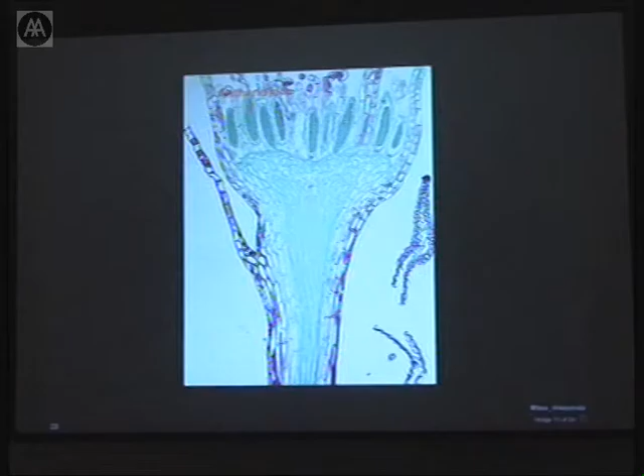So I thought to go from this to this would be an appropriate shock for the end of a long day, second of two. This is the nave roof of the Sagrada Familia church. Those of you who heard me talk just over a month ago will see some material again, but I'm going to be talking about it in a completely different light, I hope. And I promised those of you who were here last time that I would talk about these columns tonight. It's quite clear that Gaudi conceived this part of the building as a forest or a wood, and that these columns would be supporting a canopy.

The building is atypical in that not only was it only about 5% finished when Gaudi himself died aged 74, but he'd worked on it for 43 years.

He worked on it for 43 years before he had to sign off. And he had at least modelled the building at a scale of 1 to 25 and 1 to 10 to at least allow the successors to have a go at completing it.

So my role in the building since 1979, for the first 20 years, and that sounds pretty odd, doesn't it? The first 20 years was actually trying to untangle the geometries, and we will look at this column in a minute, this particular column of 8, and try and understand a little bit more about its description. An act of investigation that probably would only have resulted, given the work that it required, through the need to build it. And I'm reasonably confident if they weren't trying to finish the building, then a lot of the stuff that we'll look at now would never have been in our attention.

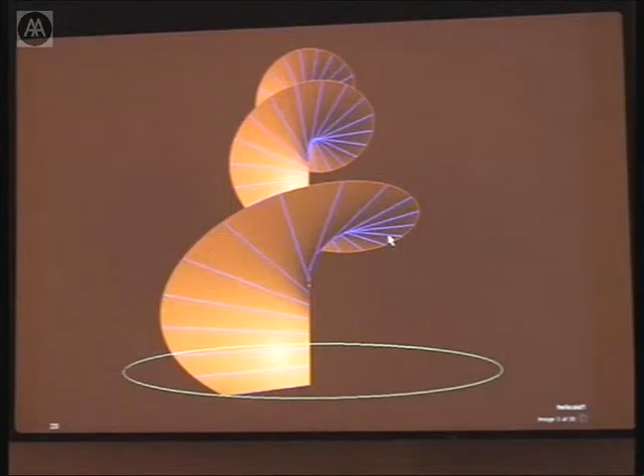The theory is this. Gaudi used 3 ruled surfaces. We looked at 2 last time I was here. This is the third, the helicoid. And the ruled surfaces, or second-order surfaces, are characterized by the fact that their double curvature is nevertheless arranged through straight lines. So you can take any number of straight lines on the surface and define the surface through that. So a helicoid typically is a staircase.

Now in this photograph here on the left-hand side you can see the column. This is a contemporary photograph that was taken in the 20s before he died, so it's no fudging, it's fact. The left-hand side is the column that for a long time he envisaged as being the columns for the Sagrada Familia. And we know about trees having their sort of helicoidal movement. I gather it's through the gravitational pull of the rotation of the Earth. And we know that in the Renaissance, quite often building columns were Salomonic and curving.

But apparently he came to the conclusion quite late in the piece that they were too unidirectional and he needed to actually try something more subtle. And that's when he came up with the idea of this column here. And it's the relationship between these two which are not apparent. But what in fact we're looking at here is the intersection of a column twisted, in this case, anti-clockwise, with exactly the same column twisted clockwise. So in your mind's eye, if you can put those 2 columns together and say, what is the result of the interaction between those columns, then you can see the genesis of this column.

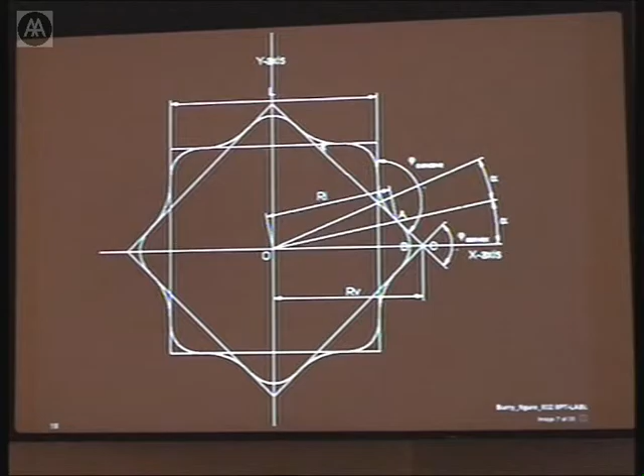So he wasn't a person that flew by the seat of his pants, as it may often seem. He really knew his stuff. And he knew his stuff because he did it himself. Now here's the genesis of the profile. Briefly, it's a convex and a concave parabola, which helpfully meet cotangently when they come together. And they have some parameters which describe them, none of which we're going to move on to today.

So this is what the profile looks like at ground level. And the best way to look at this column, I think, is through introducing the 4th dimension to it. And we can see that in this animation here. What is happening is that, in fact, there's not one profile, but 2. And these 2 profiles are counter-rotating. Each of those profiles is the barley sugar twist. I can show you what that looks like when you put them both together.

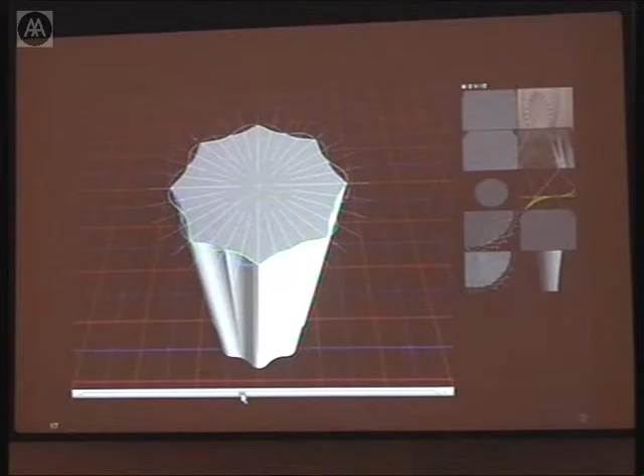But if you say we're only interested in the material, which is the grey area between the profiles, then that is the source of these creases. As the profiles counter-rotate, these creases become more exaggerated. Now this is where the nature thing comes in. What happens if you continue this particular algorithm, shall we call it, upwards? Well, obviously the column will go back the way it came.

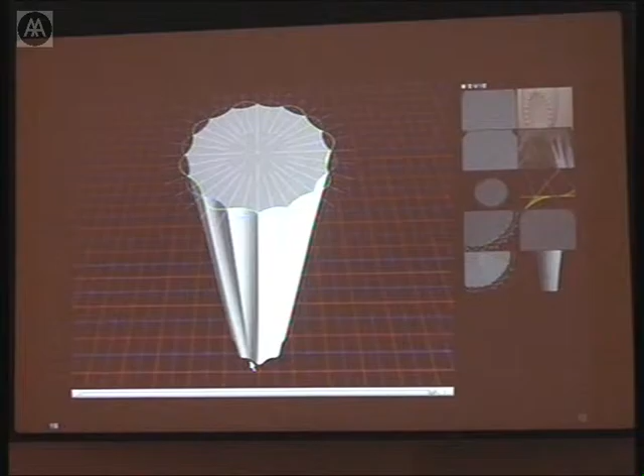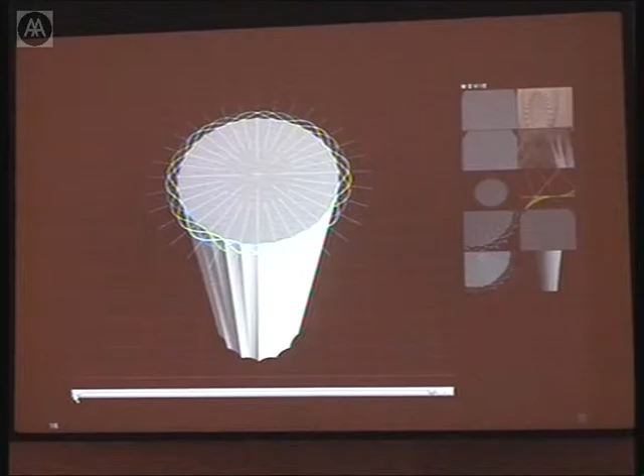And so what happens, in fact, is we find that just as we thought we had one profile at the bottom, there were two. At this point, we find that there are actually 4 profiles, not 2. And hence, we now have 4 profiles counter-rotating. And when we get to that point, it obviously goes back on itself. We find obviously that these 4 profiles are actually 8, which are counter-rotating. So there's sort of serial growth being implied here that leads to the description of these columns.

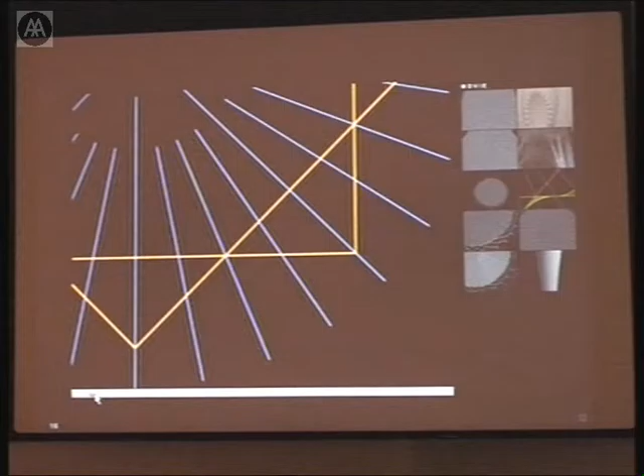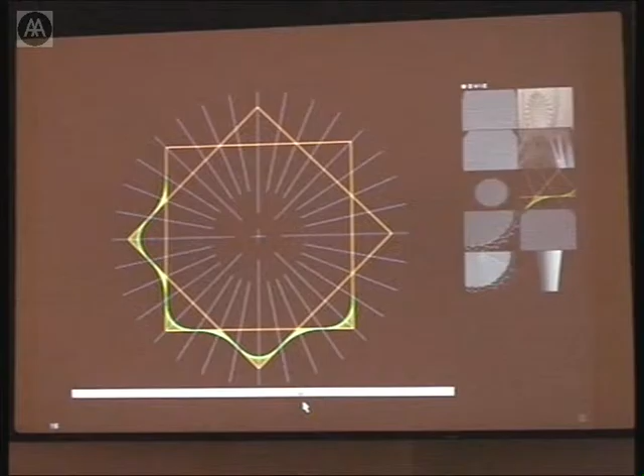The profile itself is simply discovered. It's just a whole series of straight lines forming those 2 parabolas, concave and convex. And if I just move on a bit, you can see. So that's the source of the tree-like base to the column, and you can see the way that this forms the sort of Doric fluting as the column rises, eventually, like all of Gaudi's columns, eventuating in something approximating a circle.

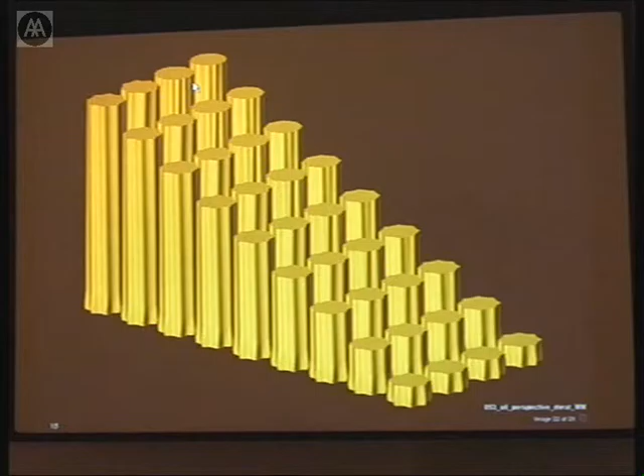This image here, you can see the extent or the subtlety of this move. It's not a very twisted barley sugar at all. It's just a slight twist of 22.5 degrees to the right, to the left. That's what they look like when they're together, and that's what the resultant intersection is. So that's the union, and that's the intersection. Now this applies for most of the columns in the building.

If we move on to this column here, where we get the branching occurring, that's what it looks like. And we haven't got time for me to ask you to pause for thought and work out what is the arrangement. It's the same schema. It's 2 counter-rotating forms. So I'll say that this tree, which is photographed just outside the Sagrada Familia, is the clue for the approach to this whole bifurcation. This object is a simple downward counter-rotation of an oblong down to this point here where they become a square, where they're exactly out of phase by 90 degrees.

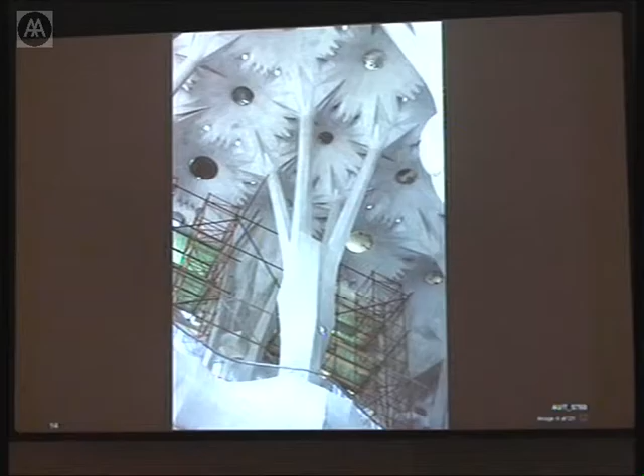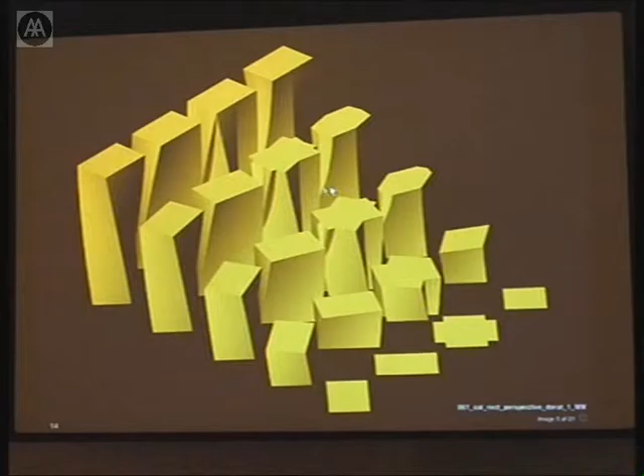So there's the alpha form, there's the beta form. This is what they look like when they're together, and that's the resultant form. So those of you who have got time on your hands, hours of fun taking any form you like, superimposing it and counter-rotating it and seeing what comes out. But it's actually very difficult to guess, I think, that the result of this move is going to give you something as subtle as that.

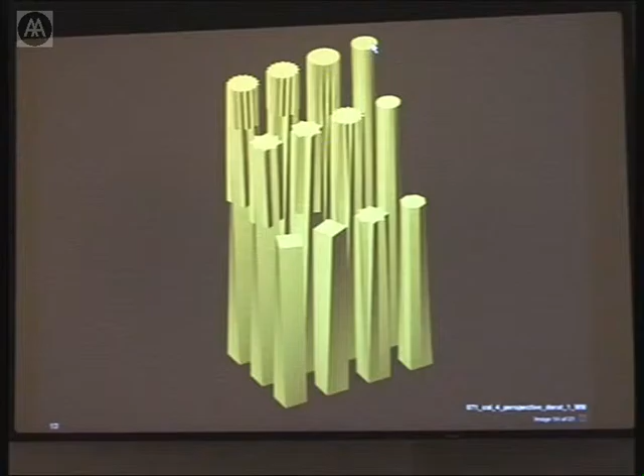And that's the point which is joined at each 4 corners; the same thing's happening with squares. 2 squares are counter-rotating. Alpha, beta, that's the union, and that's the intersection. So you can go from the square to the octagon to the 16-sided to 32, approximating on to the circle, which is where it meets the ceiling forms.

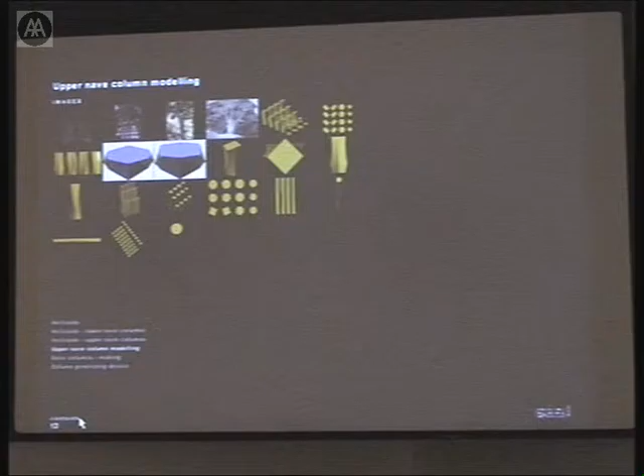Well, that's the Gaudi pre-1926. I thought I would go back over what we're doing now, which doesn't have immediate material from him other than a drawing. So this is looking at the completion of the Passion facade on the west side of the building.

When Gaudi died, he'd managed to complete the apse and just most of the Nativity facade. He'd completely modelled this area here and the sacristies at a scale of 1 to 10 and 1 to 25. The sacristies are the prototype for all the remaining towers, and that is why there's confidence among the successors that there's enough material to continue in good faith.

After he died, the Passion facade was continued more or less a copy of the Nativity facade. In fact, it's extremely different because whereas these are circular in plan, these are elliptical, and the idea for the main front is that the larger, the major axis for the ellipse will become the diameter of these towers here.

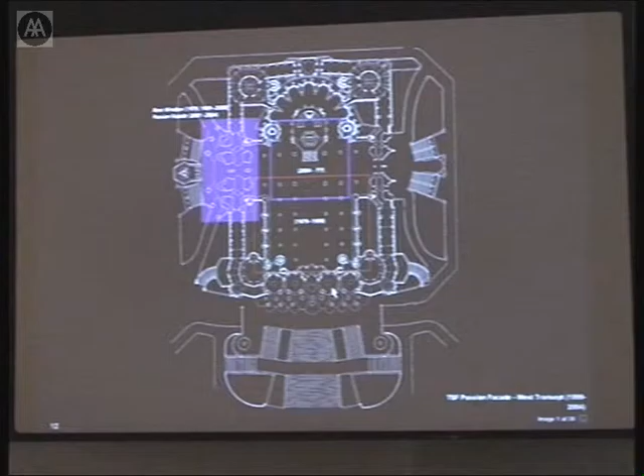This is what it looked like when I joined the building in 1979. They had finished literally the year before the second transept, and this actually is taken in about 1985 when they started building the nave at last. So when I arrived, they'd just finished this.

And those of you who read the Robert Hughes book from 1992 to come out with the Olympics will have read this very erudite tome that ends with about 40 pages of diatribe against the work of Subirachs, who's the sculptor who was given the chance to interpret Gaudi's drawing, which I'm about to show you, and complete this facade.

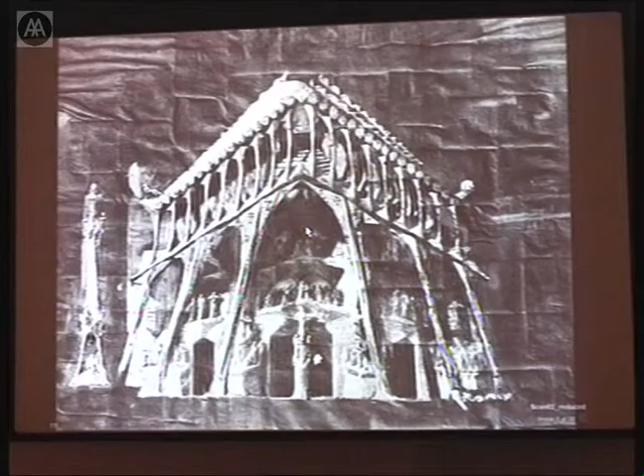When Subirachs was caned by Hughes, he was only halfway through completing the facade, this lower part of the facade, but worse still, there's actually no reference that I can recall from Hughes that recognised that the facade itself was only half built, and that in fact there's the top half. The work that I've been doing with colleagues in Australia has been the completion of this. It's the project of which we only have this one drawing to go from. It's not even the drawing, it's the photograph of the drawing.

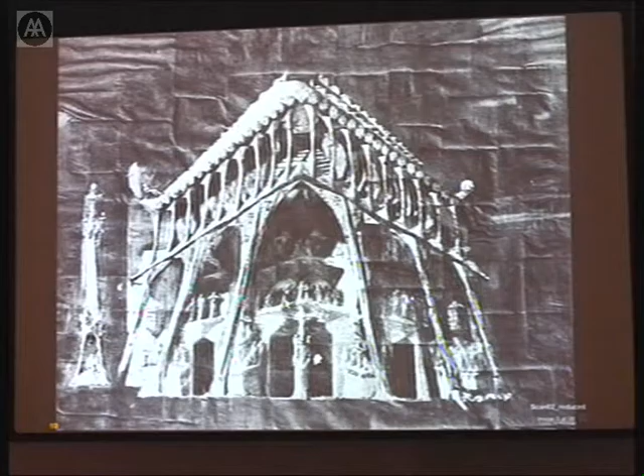So the way we've taken this forward is to look at these as bone-like objects. Here's a couple of bones, some more nature. The reason, apart from the fact they look like bones, is I sort of feel that this top half of the facade ought to be reflecting the actual business of hanging from a horizontal cross.

And so what I'm going to show you is a use of these particular geometries that Gaudi was specialising in the last 12 years. He didn't use any other geometry than these ruled surfaces, and try and somehow get a fusion between a rigorous geometrical outcome in terms of the description that he himself was applying to the building, and this more subtle need to express the passion of Christ.

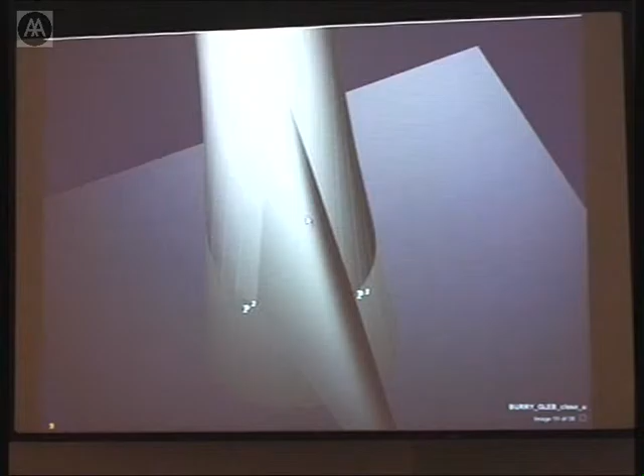So as usual, we start with the sketch, and the sketch then leads to a description of a condition whereby we've got these two surfaces which both have straight lines associated with them, and we want those straight lines to coincide. And the difficulty we have here, and why it gets very mathematical, is that if we know where P2 and P3 are, we need to calculate where P1 is.

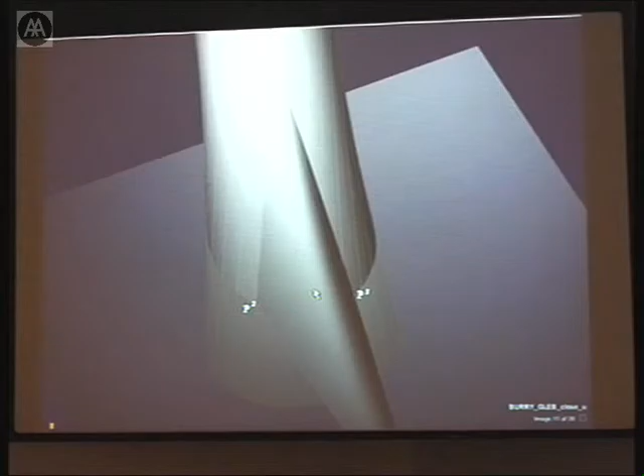This form, by the way, that you're looking at here is like a cooling tower form. So as you can see from the straight lines on the surface, it can be described by straight lines. This is the hyperbolic paraboloid, which always has these straight lines at its edges, the directrices. So the idea is to get these two lines to coincide. Similarly, if we know point 1, can we find point 2 and point 3? So this leads to a completely different form of description for the building than that which we're used to.

And we're looking at something called the schema, or the diagram that's used to communicate between the architect and the computer programmers and mathematicians who are actually going to give us the information that's going to yield these mathematical outcomes. And so that's the schema here. It's explaining that there's a couple of hyperbolas. All the things you see here are parameters with values that are flexible. And that's as close as we get to having a drawing for this particular part of the building.

This meant we go straight into scripting columns that look like this. And this is the prototype made from wax, the rapid prototype that we first experimented with 4 years ago.

And then that information ultimately drives the parametric model. Now, of course, we have no idea what Gaudi would have done with the computer, but the way we treat the computer in the office is that it has to do more than simply be a way to do the job more quickly. We have to do something with the computer that would extend the work in some way.

And what happens in this parametric model is that every single dimension, every single line is connected in some way with each other. You can't make an adjustment to anything in this model without it affecting the whole of the construction. For instance, I hope you can't see it because it's meant to be subtle, but there's a 10% increase in the gap between each column. So this gap here is 10% bigger than this one.

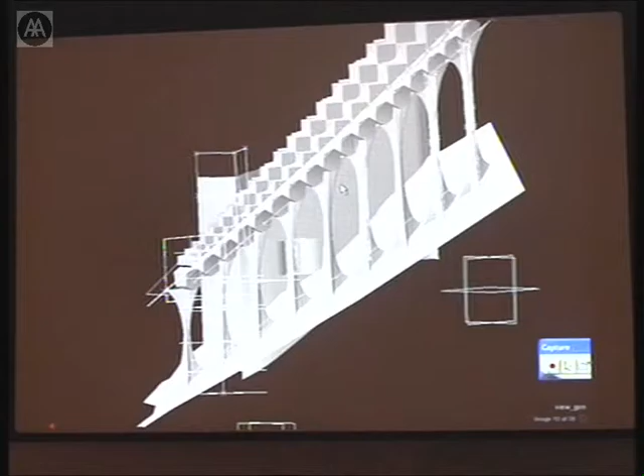reform. And the problem is that if you make a change, often the geometry actually slips out of line. Two things that used to intersect no longer intersect, which means that the program stalls and you actually have to intervene. And I think this is hilarious because although it only takes a matter of minutes for the model to reform itself, it's now taking some hours to reform all the lost or corrupted intersections. So I sort of feel that the human touch is still there, very present, despite the sophistication of the software we're using.

Because of the polemical nature of the project, we had to produce some prototypes at one-to-one. So it's back to this idea of modelling. I meant to make the point that it wasn't enough just to do the computer image. There was a need to actually have the wax prototypes at 1 to 10 and 1 to 25. Then after that, there was a need to get the columns up in prototypes, not in stone. So there's the wax prototype.

Again, another subtlety you might notice is that the straight line of one of these hyperbolic paraboloids has to slide along the straight line of the next one. The relationship between these hyperbolic paraboloids depends on the nature of the hyperboloid of revolution, which is the other form that's going, the cooling tower form. So if you make the cooling tower fatter at the bottom, then it obviously opens up the dimensions across here, which of course means that this all has to change.

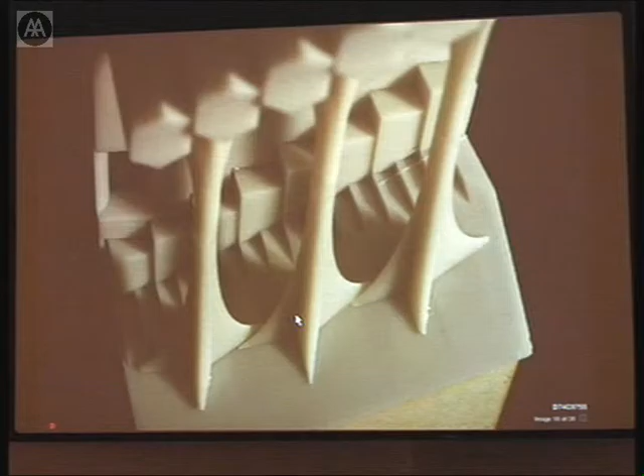So I think that's our effort to try and challenge the computer and the associated software to do something which you couldn't possibly do very easily by hand. So here's the first of the prototypes.

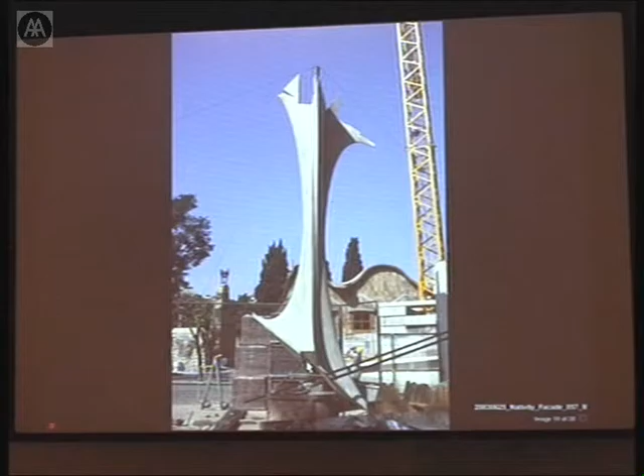I believe the challenge is to look at this and say, the geometry comes second, but the physical appearance comes first. I've tried this on lots of people who don't know what we're doing, and they're very surprised to find this actually has such a rigorous, again another Freudian slip, such a rigorous schema behind it. And there's 3 columns in place. They're there now. They've been there for a year and a half.

There isn't quite a guest book yet asking for comments, but they're certainly looking for comments, and those that they've had so far have been favourable. And here are the hexagons on the top. They don't quite fit, as you can see. They're being fitted. And that's from a side view. And this is, I think, another one of these moire effects.

Here's the kind of condition of the Sagrada Familia, which is very messy, but extremely vital as an indication of what I believe is the way we should be looking at our working environments. I don't mean physically the working environment, the way we work with each other. And that is not to be too up a tree in terms of the digital.

There's Subirachs, the artist, who we have to collaborate with on every project. At the beginning, we don't tell him what to decorate. We listen to what he wants to do and then work out how we're going to conform with his wishes. So those are his tools here.

Mr. Bonet is the architect director, aged 81, as he's proud to tell everybody he meets. He works with a slide rule, which is always in that pocket, and on paper and pencil, and typically, apart from the initial sketches on a sketchbook, I myself will be working digitally.

This is the other sort of messy thing: part of the team doesn't actually work or live in Barcelona, but lives in Melbourne, Australia. So we've been very early adopters of this kind of technology. Interesting that we both have to print the model at each side of the globe so that when we have our video conferences, we're handling the same object. I'm sure social scientists would have a lot to say about that.

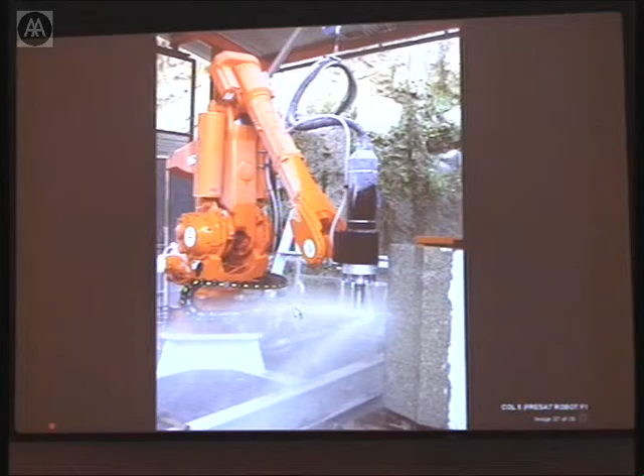Now, he's quite interesting because not only is he from a long line of stonemasons, but he's also a bit of a whiz at computing, so he's a computer programmer himself. And Chris Williams before was talking, I think, very pointedly about the need to get under the bonnet. And I can't help but agree. And the fact that this guy here has taken the trouble to learn how to program this machine here.

Not only has he programmed this 5-axis machine taken straight from the car industry to do its thing, but he's also added another couple of axes through a turntable. So he's actually got 7 axes of movement. And originally he didn't like me showing this picture because he said he was worried about his competitors. Now he's realised that even if his competitors get this machine, they won't know what to do with it. So we're able to look at it.

How are we doing for time? Another 10 minutes maybe? I thought I'd take you into the... Just start leaving when you've had enough. I know I would.

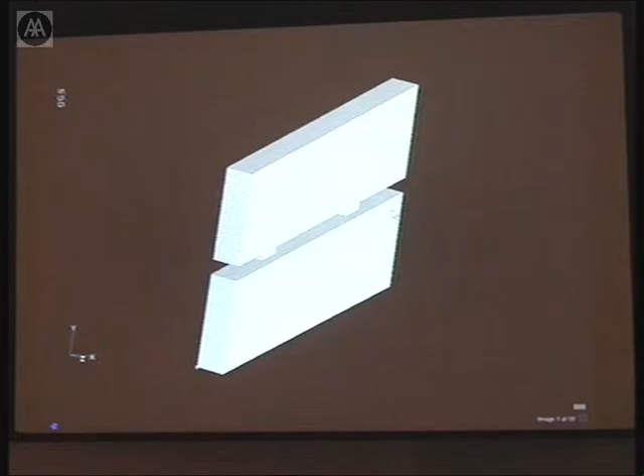What's very interesting is taking this into the next dimension, which is working with the innovative structures group, who are our colleagues at RMIT University, and their evolutionary structural optimization software. And what the software does is it will take a notional mass and just whittle it away, testing it for efficacy to a point like that, where you can see something emerging.

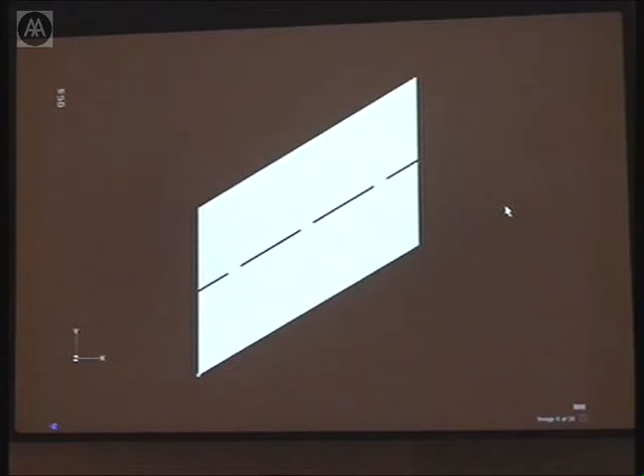This is what's known as a design space. So we're looking at a mass front on, and it's representing part of the colonnade. And there's a condition which is saying that the top and the bottom are separated, but they're connected by what are going to be 3 columns. So when you go through this, I find this is magical myself, this process.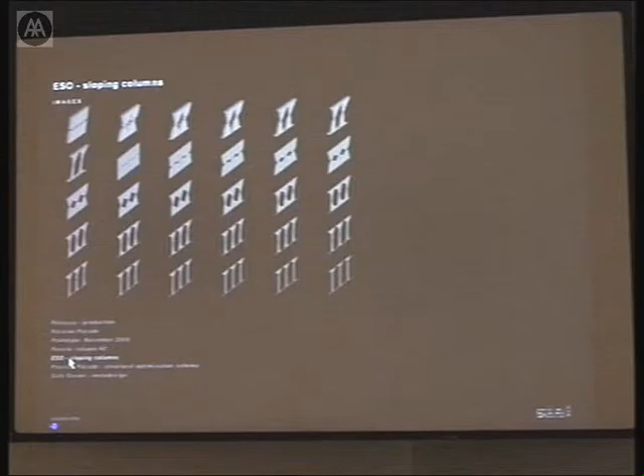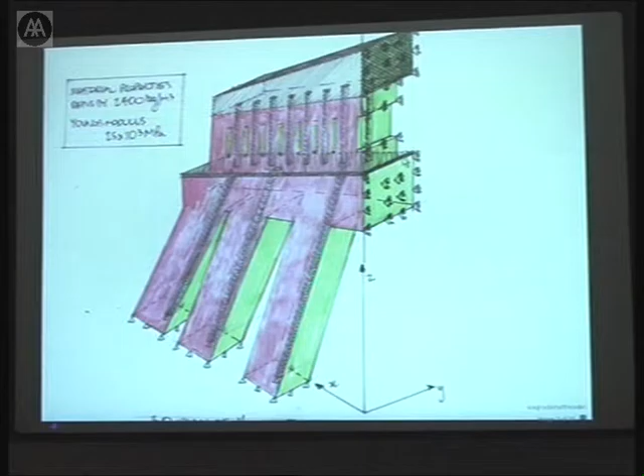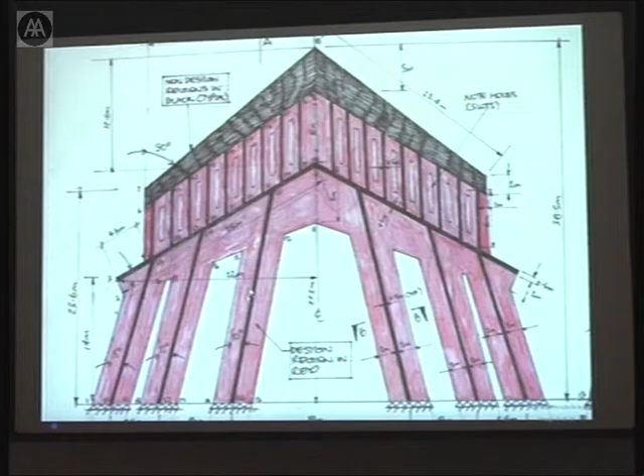What this is about is taking the schema. So this is the engineer schema rather than the geometrical schema that I showed you. This is the way our structural engineering colleagues have looked at the problem. So you can see that it's physically recognizable. It's given some constraints by the fact that these columns will be inclined. But these ones, there aren't any constraints. And then you can see the inclination. And this is a whole series of these whittling away, and you get something which isn't too far from what.

It takes ages, this process. It's many, many hours of computing. I think this one is 36 hours to do what I'm doing. It has to check every little cube to see whether it's really necessary or not. And we do have an animation of this, which does show how this all looks.

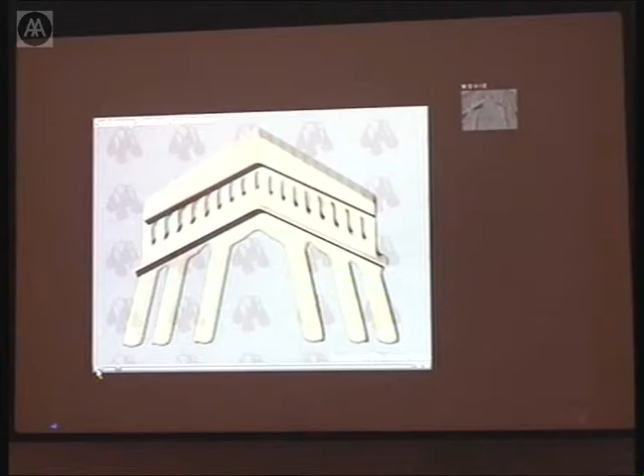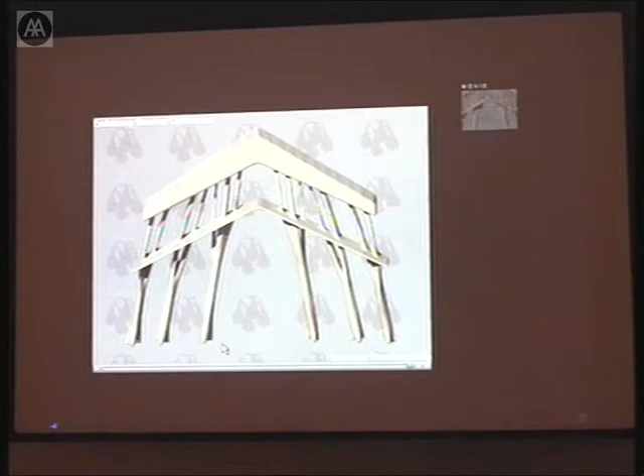Now, as we know, Gaudi didn't have these tools, but obviously the intuition was transcendent if he was able to produce something which the latest computational techniques verify but don't actually create. Right.

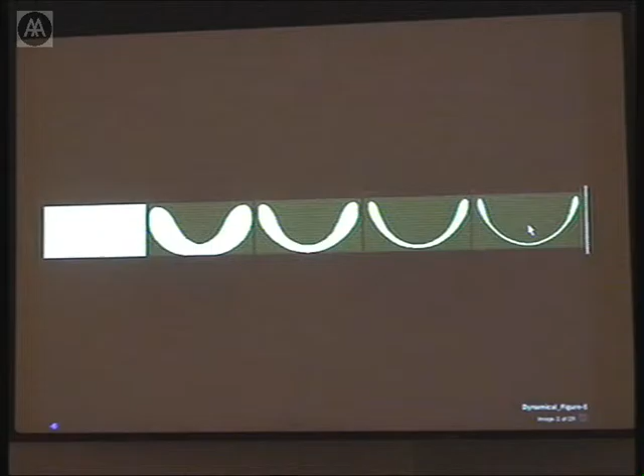This is looking at the structural optimization at work. I first became aware of it when I saw this series of 2D exercises from Mike Xie and his team. And what it's doing is looking at, if you take a mass and you have it supported from one point, what would its ideal shape be? And this is what emerges. So this is the kind of nature connection that actually a cherry and an apple are ideally shaped to do the task that they have. And equally, this is what happens if you have something which is hanging between two things.

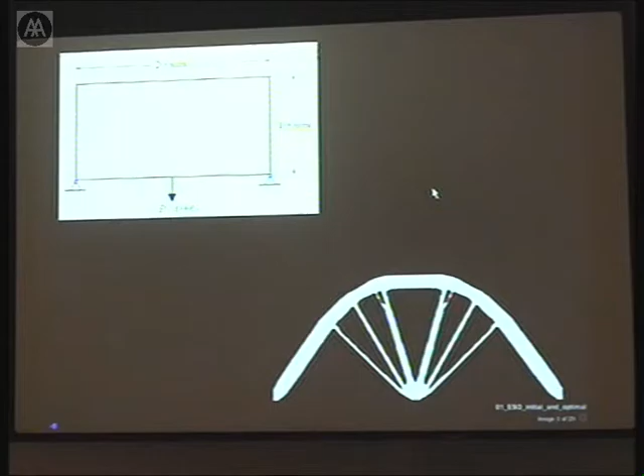Now, it gets very interesting because it used to be called ESO, now it's called BESO, bidirectional evolutionary structural optimization software. The reason it's interesting for me is because I asked Mike, everything seemed very reductive. What happens if you actually start adding stuff? And so what he's done here is a series of experiments where he's looking at, in this case, adding material to form this arch, in this case subtracting.

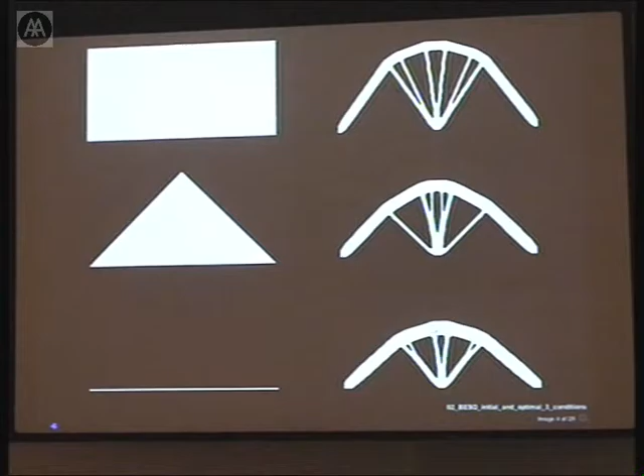So if you subtract from an oblong, you get this shape, and if you subtract from this triangle, you get this shape, and if you add to a notional plane, you get this shape. And apparently they have exactly the same performance physically and in all other respects, except they don't look the same. You get these kind of very weird and unbuildable, at the moment, objects like this.

But this is the most interesting of all the images, because this is the reductive process starting with this, and this is what you get. It's the ideal table to take a mass of whatever it is there. And this is where you take a design space and say, make me a table that would support this weight. And they're similar but not the same. But apparently the similarities from an engineering point of view are fantastic. They're very, very close, volume, centroids, all sorts of things.

I said to Mike, but Mike, they don't look the same. He said, yes, you're right. Doesn't matter. Now, of course, I thought that was the most telling opportunity for our dialogue to go up a notch. It does matter, of course. And what it's now opened is a whole debate; we do a lot of work together. We have several Australian Research Council grants looking exactly at this whole dialogue issue between architects and engineers. And now it means that we know that there are obviously lots of optimal solutions.

You would have thought by definition there should only be one, but apparently there's lots. I mean, here's an example of this. Again, I think this is a very good one, because it messes things up a bit, and we still make a choice. The architect will choose one rather than the other, probably.

We have taken this stuff on. This is work in progress. It's a competition that we got into the final group for a monument, a New Zealand War Memorial in Hyde Park, I think, and working with an artist who conceived of an albatross winging its way back to New Zealand, suspended between two crossing arches that would look a bit like this.

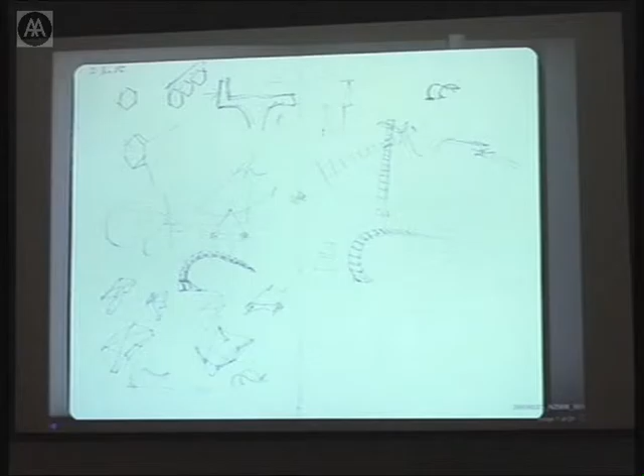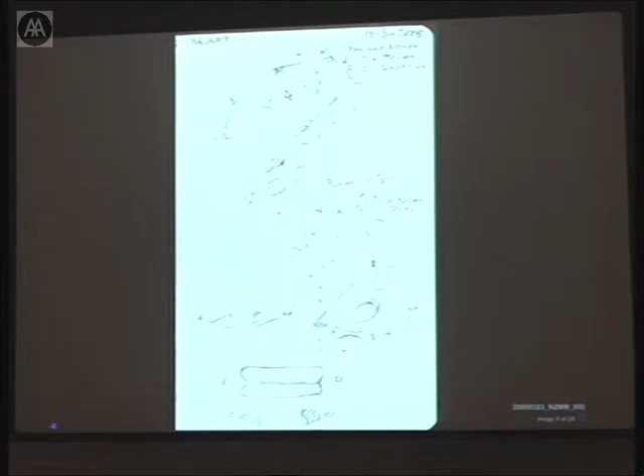So we started looking at whether we could actually make this into something approximating the structure of a hand, where these are the bones, with something tensional along the top. And this is the original sketch that we were working with. And here you can see the beginnings of a model which can be sculpted.

Now, the only interesting thing about this stage, because I say it was work interrupted by not having won the competition, but we are slowly taking it forward, is looking at this work where we're actually seeking to combine a parametric model, this ESO software, and finite element analysis.

So what this is doing, it doesn't show anything, but it's actually looking at whether or not you can get the required movement, because this is meant to be a vaguely kinetic object, and still maintain the physical properties. There's obviously the sort of stress diagram there.

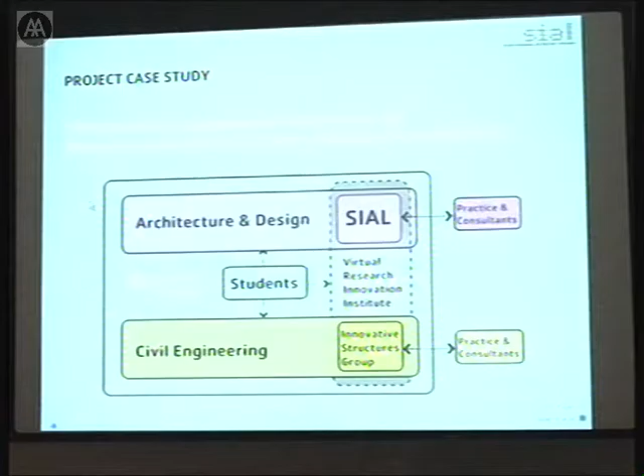Now this work's been taken up by Dominic Holzer, who has just finished his master's looking at this very thing. He's been trying to look at this relationship between architecture and civil engineering via the two research groups. We run a laboratory, and we're a laboratory rather than a studio because it implies that there's experimentation. And Mike runs the Innovative Structures group.

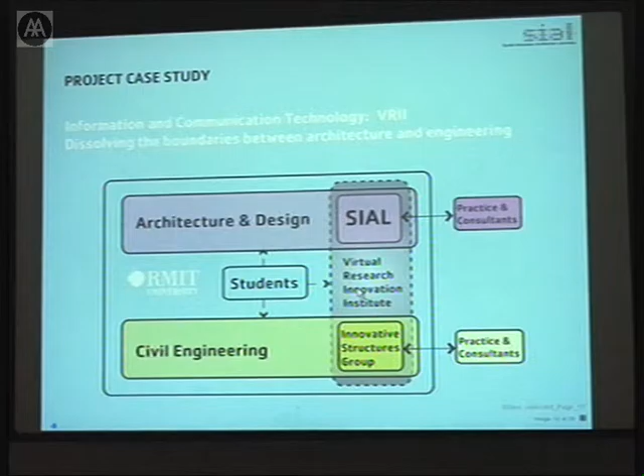And Dominic has found himself in the middle doing his master's, having been in practice. He was an associate at Alsop's for a few years. And he's just trying to deal with this. So he did a series of projects. What we're looking at is, Hugh Whitehead will know about this, he's sort of, I think, coined the term of co-rationalization. Does it come from Hugh, if he's in the audience? But anyway, the idea of actually the architect and the engineer designing in tandem, which has been talked about today a bit.

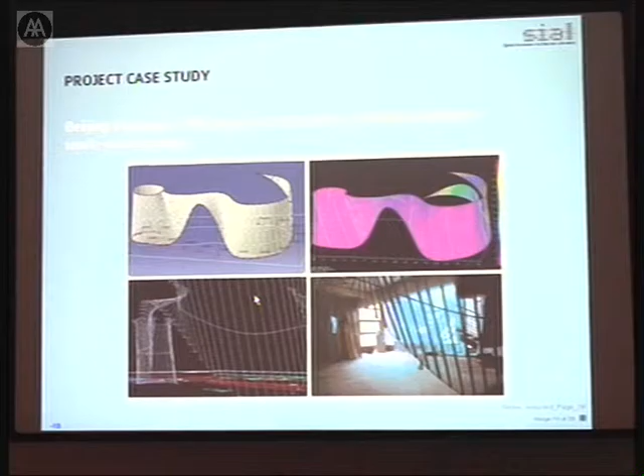And this is a screen for the Beijing Biennale, which we were contributing to two years ago. And this was very interesting because what it revealed was that the engineers in their experimentation weren't able to yield results in time to influence the project. So this was kind of another messy thing, that if you're experimenting, sometimes the experimentation period is longer than the time you actually need.

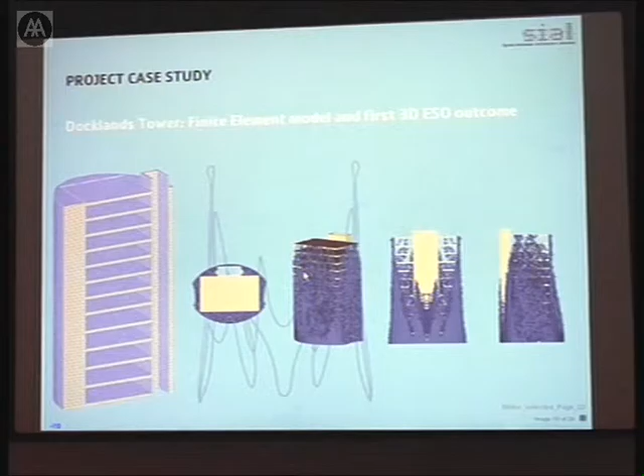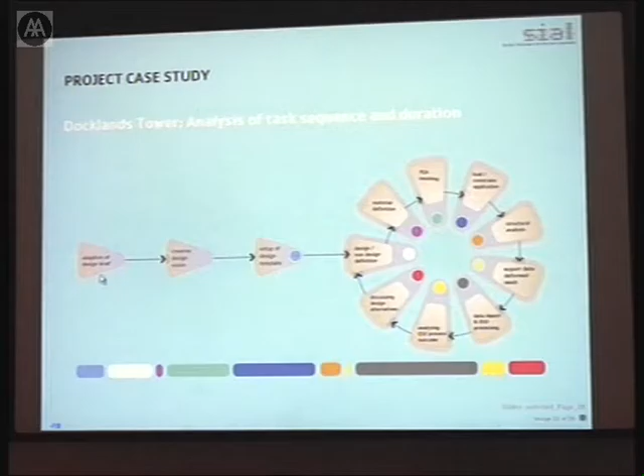Dominic's been looking at using this software to find what would be the ideal form for a tower, again using the constraints from the engineers, and a whole series of outcomes. But the one that I just wanted to dwell on is this issue here, where he's actually looking at the analysis of the task sequence and duration and the number of softwares that you actually require. So in this case, the workflow diagram showing the original relationship with the various software we all have to use.

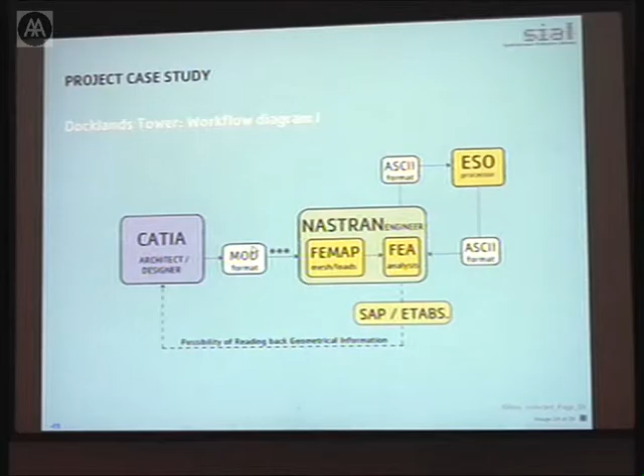So you can show this tower being whittled away as if it's such a simple press a button and you've got a tower, but in fact it's a very clumsy association of all this software. And so his work's been looking at a whole series of plugins which will allow eventually a containment of all this process. We still seem to be a very long way off getting this kind of conversation.

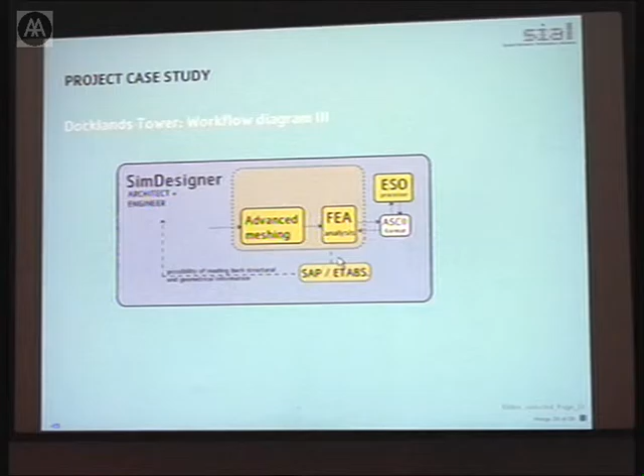Now this isn't a question of just whether one software will read the three-dimensional output of another software. It's actually more fundamental. It's actually looking for the performance characteristics that are associated with each model and trying to find a way of getting those performance characteristics to interrelate.

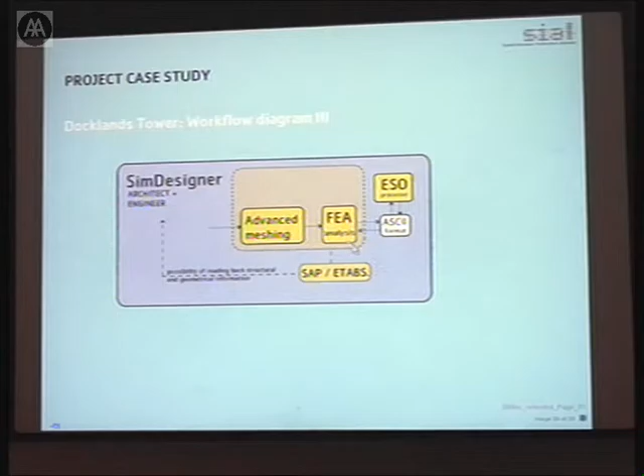Moving on to the scruffiness of a student, this is Stephen Swain, who wanted to look at using Mathematica as a design tool. This isn't Stephen Swain's work, I just noticed, is it? He's been looking at using Mathematica, and he's a senior student doing the pre-major. Pre-major isn't the final project, it's just the experimentation you do to try and state your case. And he's worked hand in hand with an engineering student in the final year.

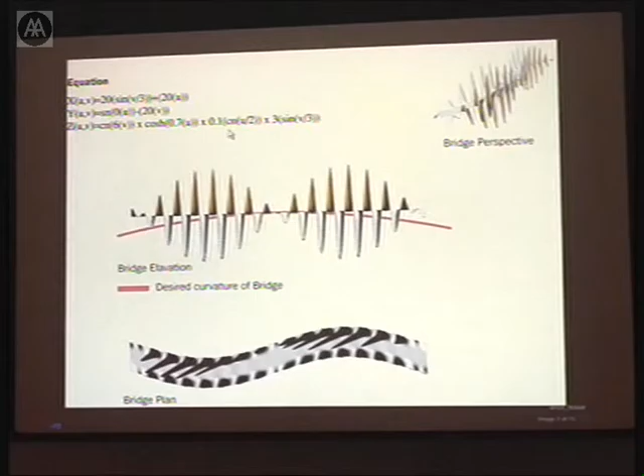So I'm just going to flash through it. It's just an amazing opportunity that we didn't think would come quite this far, when you've got the abilities of an engineer being harnessed with the abilities of the architect to take something far forward. Both the individuals said they had never expected to get where they got to. An interesting thing about Stephen was that he had actually failed the course previously. So in many ways he didn't look as if he'd be the right student to take this on. But he got into this stuff very eagerly.

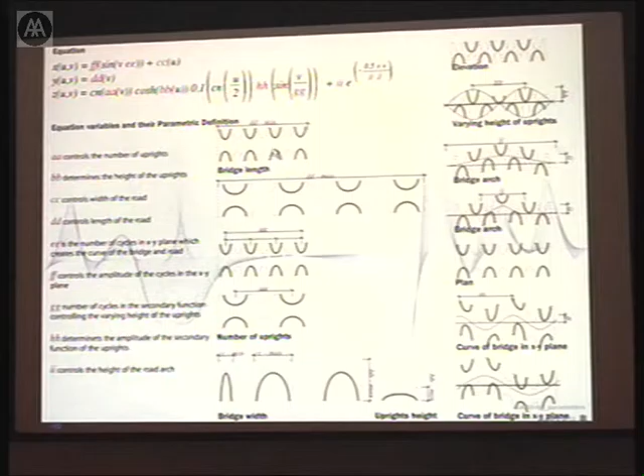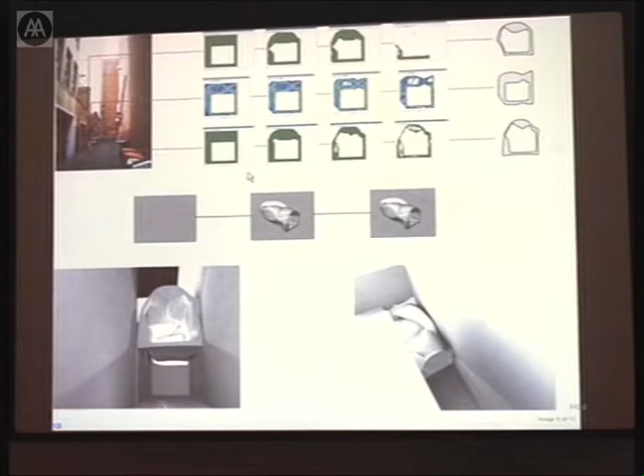These are the sort of equations: Stephen would describe what he'd like to do, and the engineer colleague would find a mathematical formula that could go into Mathematica, and between them they could work out a number of strategies. They looked at the tower. They looked at trying to get a hybrid, there's a railway station, then a hybrid form where the inside of the surface would be one building and the outside of the surface would be another. So this is one of these periodic surfaces. What we're looking at here is a block of apartments that's containing a church inside. And so you get this kind of space on the inside and this stuff on the outside.

I'd love to go over this project in detail, as I would with the next one, which is this bridge. But what I just wanted to draw attention to was the fact that there is this very fertile engagement that can only happen if you've got these cross-disciplinary opportunities. And the trouble with schools of architecture typically, the ones that I know of, which are quite a few now, where there is a school of engineering round the corner, like I was at Cambridge University and we only had to step outside and there was the engineering school, the only reason we ever went in there was to break something. We never engaged with them in any way.

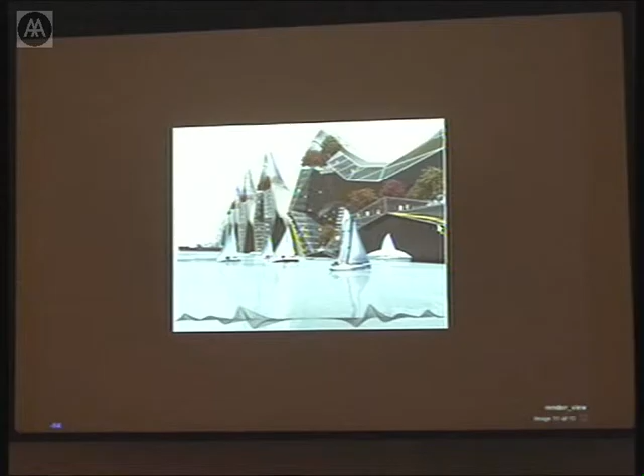And it doesn't matter where I go, with the exception of Bath, I have not come across any really sensible programs. I'll be interested to see if Bath's is continuing with the same momentum, but certainly it's been very, very difficult in Australia to get engineering schools and architecture schools together. But this, from our point of view, is not a project, it's just an experiment with a particular approach to design and a particular way of coordinating work with architects and engineers.

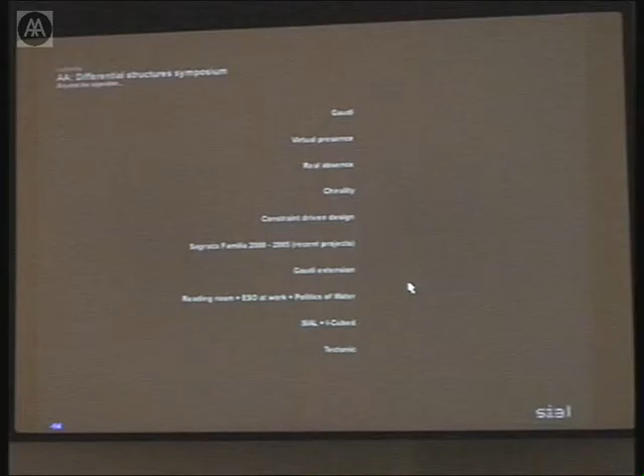Now let's get into the home straight and get back to Gaudi. So this all seems highly contemporary, I hope, because I want to try and dash it all by showing that in fact this kind of thinking was there with Gaudi a long time before any of this computational stuff came along. And so we're back to nature again, looking at this door in Casa Batlló. The question about depth, by the way, was solved by Gaudi in lighting the depth by simply putting dark blue tiles at the top of the tower and white tiles at the bottom and a gradation between the two, thereby not having to worry about having a dark space at the bottom. Anyway, that's an aside. Here's the door in the same building.

What has always fascinated me about Gaudi's work is this whole sense of movement. It doesn't matter what materials he's using, they're all inert, whether they were previously living or not. Somehow he's able to get a sense of life within the material. In this case, we can see something inside that wood just desperate to get out. It's so desperate that it's already beginning to rupture in these little buds. I thought I had a detail of it, but they're beautiful little buds. It's a bit like my moss, the operculum. The operculum's gone, the little thingies are opening up, and the spores are about to come out. So that's one aspect of Gaudi.

Another thing that we've mentioned today is this idea of the pursuit of perfection. And Gaudi, we would have thought, with this extraordinary, rigorous approach to using geometry for the first time in his work in the last 12 years of his life, would be not particularly interested in having models extracted from the street to pose as one of Herod's soldiers with 6 toes.

But Matamala apparently came to Gaudi and said, I've got this character which I think is ideal, he's ugly enough to be one of Herod's soldiers, but unfortunately part of his physical status is he has 6 toes. So should I just make him with 5 toes? And Gaudi apparently said, no, of course, we must represent nature and all its foibles. Okay, that might seem a bit of a one-liner, but we'll keep this one going.

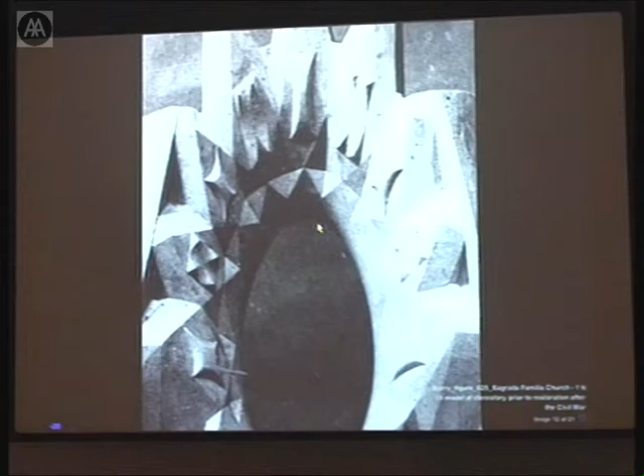And similarly, so that's what we're calling the alpha. If you look at the beta, this one and this one, we find exactly the same things happening. They're the same objects. They're what we call paramorphs, basically objects with the same topology but different topography. And we saw Michael talking about this, I think, in your lecture too. Okay, so we now define that there's an alpha and a beta, but what is running them?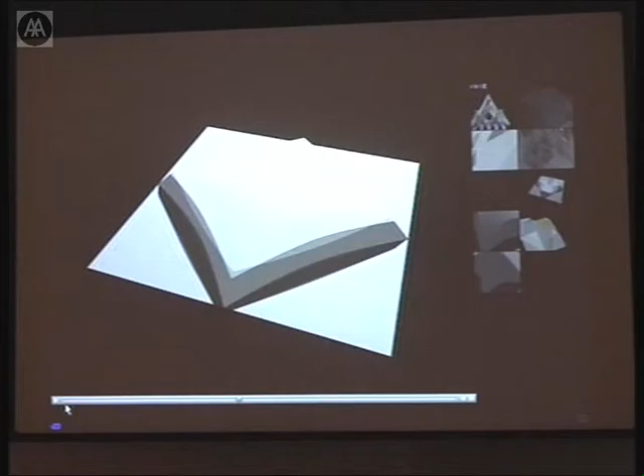Taking this to the next level, well, don't we have to see this to appreciate it? And I think you do. Here it is in the 4 dimensions, I mean, you need to sort of get this in the 4th dimension. Here is this sort of relaxing from the alpha to the beta. And you can see it just settling into, there it is in the neutral state, and it's homing in from this pyramid to this beta form.

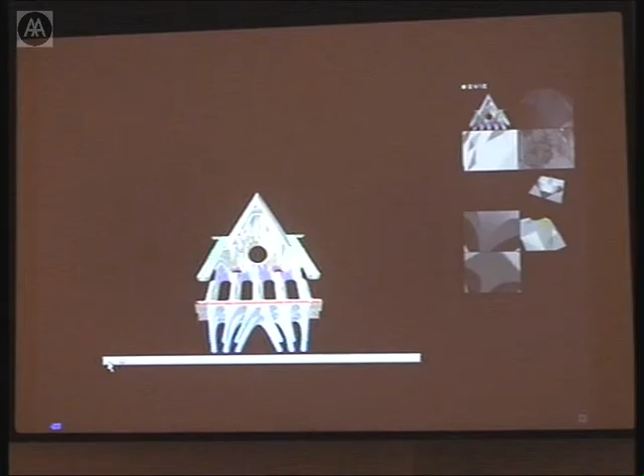Now, if you think back to the door with the expression of life within the timber, I think what Gaudi's doing here is exactly the same thing with the stonework. And of course, this isn't happening, but in the stone, this is what's trapped. Now, the reason I'm particularly confident of this is that there is an extract from a commentary by one of Gaudi's assistants called Martinell, who asked Gaudi, "Master, why do you make your work so difficult? Nobody's going to ever understand it." And Gaudi said, "But that's exactly the reason."

So what I think is very important about this is the fact that such a simple little thing as these motifs actually do have an algorithm. You need to actually tackle that algorithm to do the animation. Obviously, there's 250 frames to that animation. I didn't model every single frame individually. I wrote a little script, and it was a script that was less than 1 page long that was able to write all the different iterations.

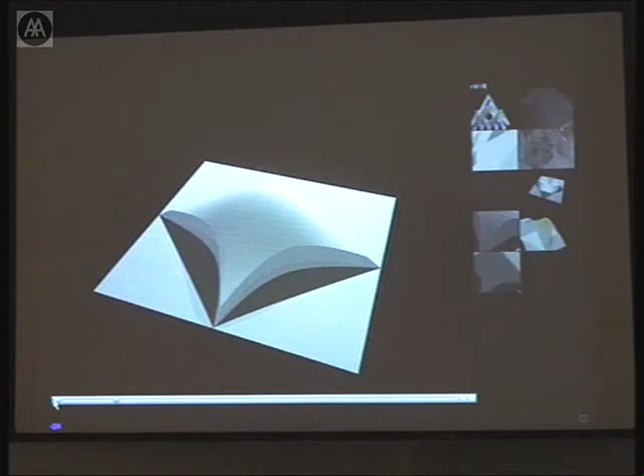Of course, by having the script and being a kind of inquiring sort of person, I realized that there's the stopping point. With Gaudi, he must have actually had a sense of what the ideal shape would be for the alpha and what the ideal shape would be for the beta. But what happens if you stimulate it with a bit of drugs or something and make it a sort of turbo alpha and a turbo beta? What you can see here is this monsterism actually appearing. It's constrained by the fact that you've got this alpha and beta in the actual finished product.

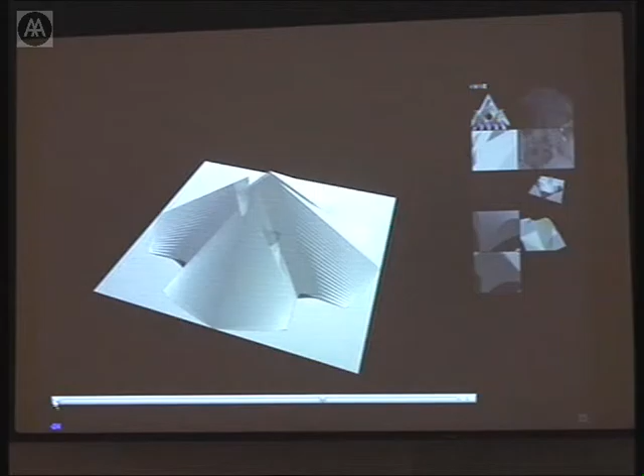But the algorithm which actually goes from the alpha to the beta can start ahead of schedule and finish after schedule. And of course, in our contemporary world, we don't actually need to even worry about what material it is. We can actually go sort of hyper alpha in glass and then just take this down for a series of iterations. This is usually better with no light at all. And you get these gorgeous, I think they're gorgeous things. It's just the same algorithm. All that's happened is that it's starting a bit earlier and finishing a bit later and coming out with this stuff.

And then for those, this business of a plea for not necessarily having to get engaged with the most expensive software in the most expensive way. This is an interpretation. It's part of a piece that I'm doing with a sound artist. I'm not playing the sound now, but looking at whether this whole adventure can be explained in more poetic terms as a means to try and just answer that question that Martinell would ask to Gaudi, but what if nobody understands what's going on? So that's the penultimate thing.

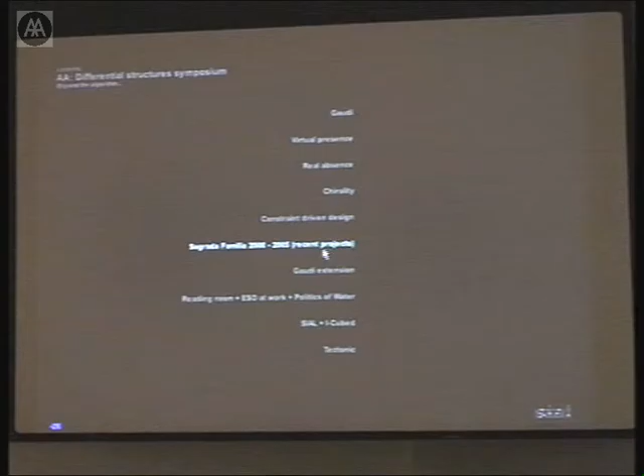I'm going to finish up with, I'm going to go back to the column of 8 and make my main point, but I won't have to do much. I just need to show you it. Column generating device. Gaudi didn't have the computer to have the four-dimensional explanation of the column. He had to do it another way, so he came up with a device. Although there is some suggestion that even this device was invented after he died.

The fact is, when I came to the building and had to start looking at the geometry of these columns, the guys who made the column said, well, you can worry about the maths if you want to, but in fact, it's just simply this. It's just the profile at the bottom, counter-rotating along one rail and then doing the same thing along the other rail. And you can see this in detail. It's rockin'.

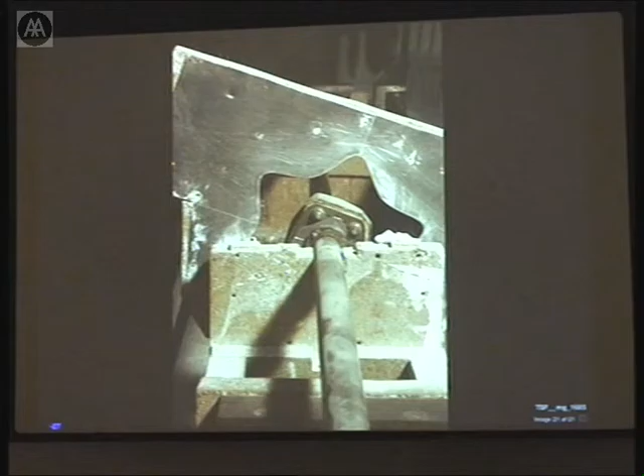Okay, now I've seen a very competent individual who isn't an architect see just what I've just shown you, and he still didn't understand what this is all about. So fortunately, on another occasion, he was able to see the whole process as I videoed it. And there's the column itself doing its thing, as you can see. It's just exquisite. And here's the process.

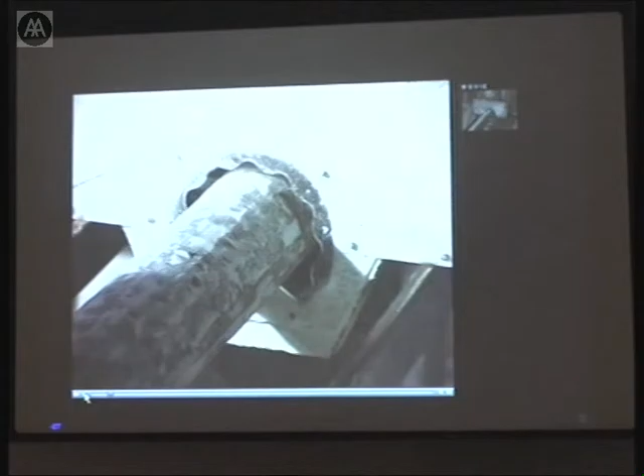There's the profile for one of the columns, and there's Josep, he's just about to become the head modellist, getting it ready to produce one of these columns. And the way he's going to do that is put plaster of Paris. There's the guy there really trying to get to grips of what this is all about. He's actually, Carlos, he actually runs all the financing of the project. So he's kind of super bright.

Anyway, so there's Josep. This is a bit like watching paint dry. It takes 3.5 minutes, but I think it might ruin the effect if I do my usual scraping through it. So you can see some pretty obvious things. That's what plaster looks like when you're pouring it onto half a drain pipe. Yes, maybe I should move it a bit forwards. Oh, no. Yeah, it's building up.

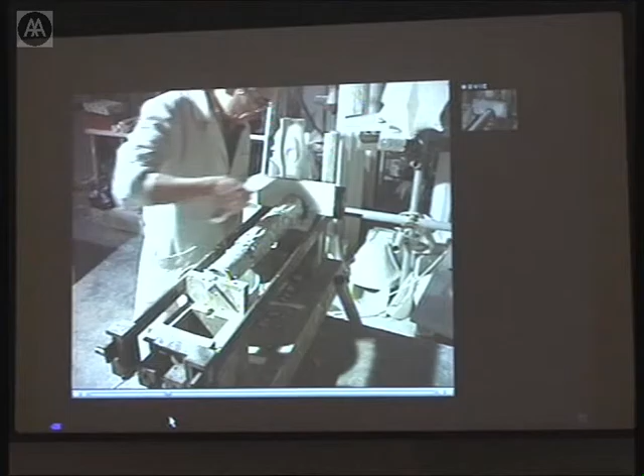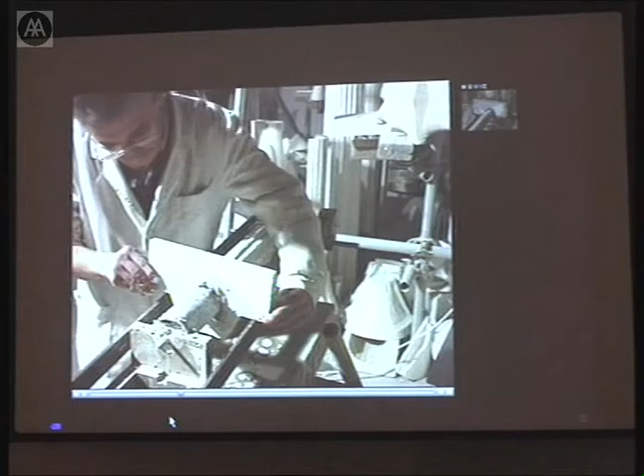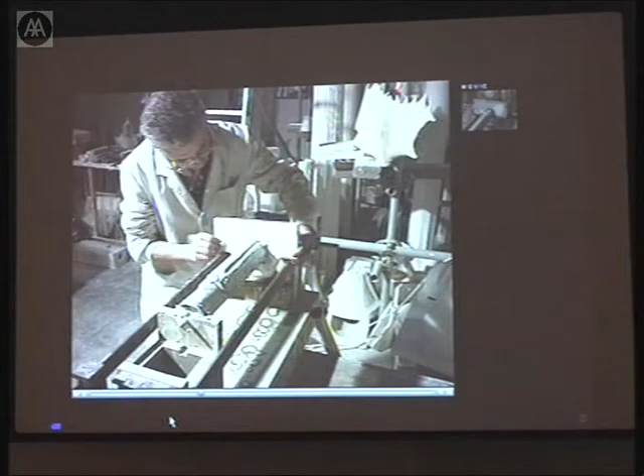Now, the reason I'm playing this rather than just showing you the key moments is I think, from my experience of 20-something years in, looks like it's stopped itself, doesn't it? In this game, that to lose this activity would be a real tragedy. And it's very interesting that with the work that we're doing with engineers in Australia, one of the research projects is looking at the role of the physical model as the principal device for architects and engineers to try and understand each other.

So just that, even at the end of this process, Carl, as the accountant, still didn't understand spatially what was happening. Even though he saw it, he just thought it was a miracle that this thing came out, and he actually watched it. But I think that the idea that the model itself, the physical model, is the principal tool for communication between two very different professional groups who are obviously, as Gaudi himself showed, completely aligned, is a very, very interesting trajectory. And probably the computer model itself won't be enough.